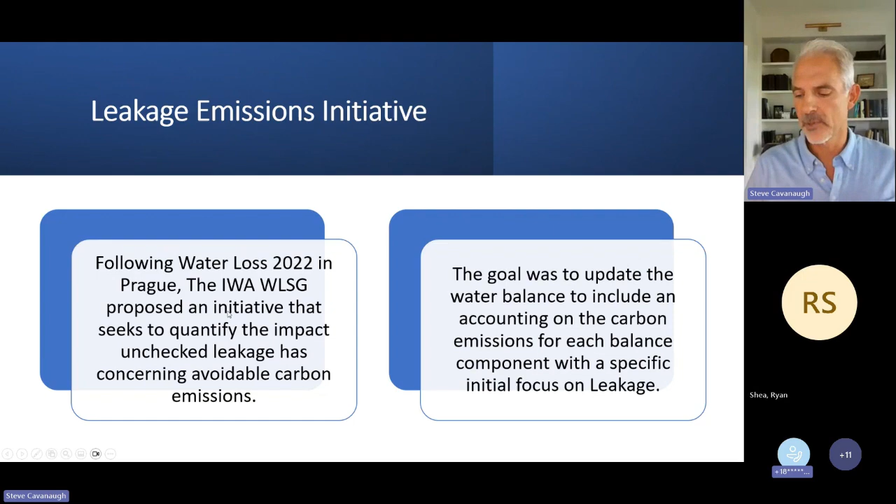So our initial goal was to update the water balance. I'm going to describe that in a moment, and then really create the carbon water balance that we could definitively be able to push out globally.

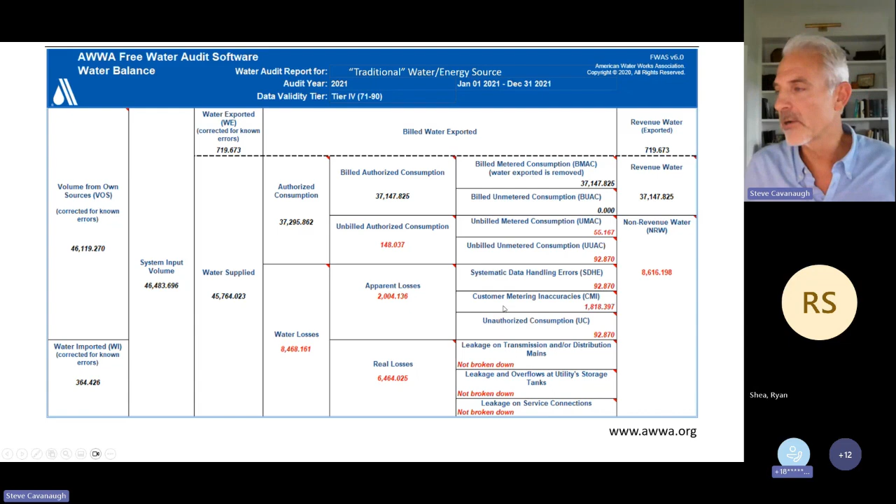The largest component of this always is in customer metering inaccuracy. And this is the nature of meters. It's getting better based on the solid state meter technology that's coming in. But the majority of meters in North America are mechanical style meters, nutating disc. And so that meter is actually not going to get faster over time. It's going to actually slow down based on the tuberculation that's in the water and the wear and tear on that moving part. So customer metering inaccuracies is a big portion of this.

Systematic data handling errors between the billing system of the date and time and measurement quantity of the read to the point at which the bill goes out the door, and then the corrections, the errors, the stopped meters, all of those things that happen in those handling aspects. And the other, we from a friendly way, call it unauthorized consumption. I call it more directly theft, people helping themselves, and that is a challenge in distribution systems, some more so than others. But the sum of these three really get us to what is the apparent loss or the commercial losses. It's important because that's different than leakage.

And this is where we're going to really focus our time on in the carbon discussion here in just a moment. But it's important that this water balance and the methodology and these best practices that we really latch onto these as well, because if you look at this without doing an appropriate review and evaluation of your apparent losses, it's a balance, and the resultant is system input volume, breaking out how much is actually water supplied to distribution, minus our authorized consumption, minus our informed estimates, and through testing of customer meters, our apparent losses, equals on a top-down basis the real loss. And so this is our resultant number that now we can look at and really start to take actionable steps on.

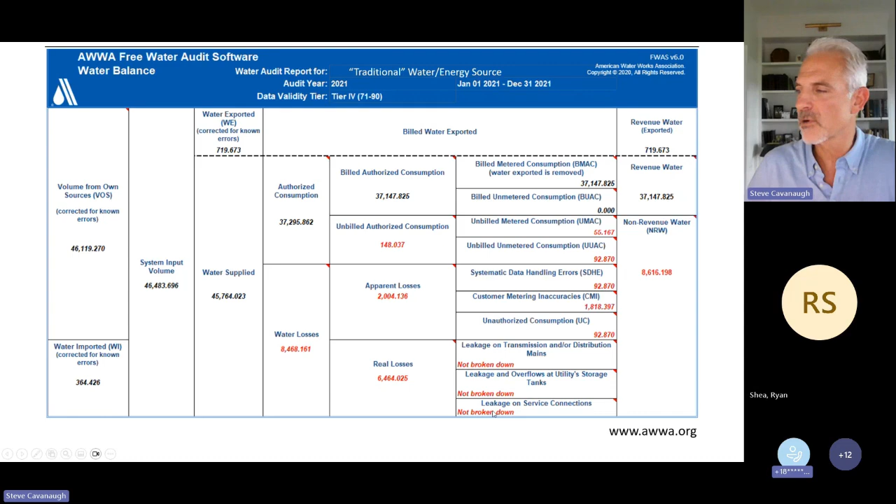All right. So I just showed you the water balance, the top-down methodology, but in leakage management, you have to now break the leakage down, because if you remember on that previous slide, it said not broken down, how much was on transmission mains, the overflows at storage, and service connections. Where we start to break down leakage is we get into what's called a leakage component analysis.

And this is important to show how we go from the top-down water balance into a component analysis to say, okay, utilities are now, at least through several research papers and best practices and technical presentations, starting to track what they are responding to, what we call reported leakage, the leaks that find you. They come to the intersection, they close the streets, they flood the Los Angeles Lakers floor. It's the ones that come to the surface. You have to interact with them.

And so now we're tracking it. We're saying how many leaks did we respond to on mains and service lines, and then making reasonable estimates of that total leakage based on runtime. The other side of this is background leakage. This component here, very important. These are the weeps and seeps that are a function of the physics of your system.

Every distribution system is operated under pressure by law from a safety and water quality standpoint. So there are so many miles of main, the operating pressure and the number of service connections. Those are the elements plus your infrastructure condition factor that make up what is your technical minimum. Unless you replace the asset, the pipes, or unless you modulate or change pressure, you're going to have that amount of background leakage.

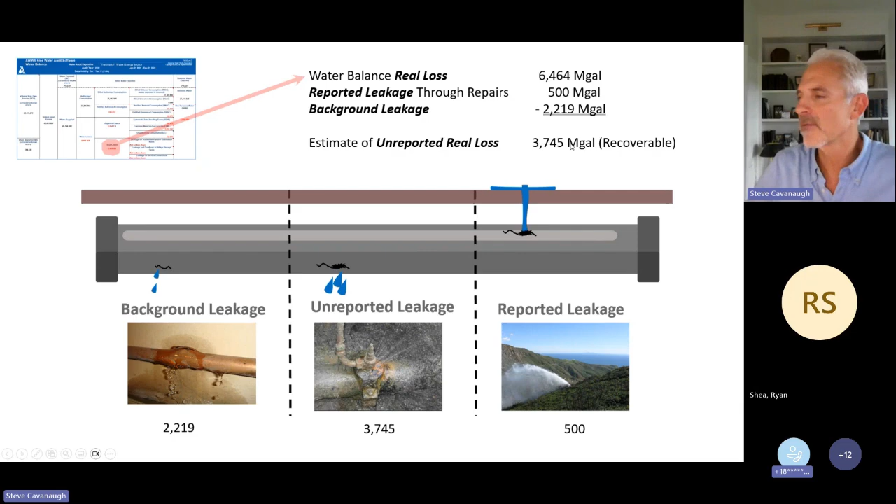So now I want to go back in your mind and think about those three things I talked about to get us to what is the specific carbon intensity. So it's the energy source in terms of how dirty the power is, the grams of CO2 per kilowatt hour. It's how many millions of gallons we put into the distribution system. So total system input volume here, following that same example that I was doing before, that's 45 billion gallons going into distribution.

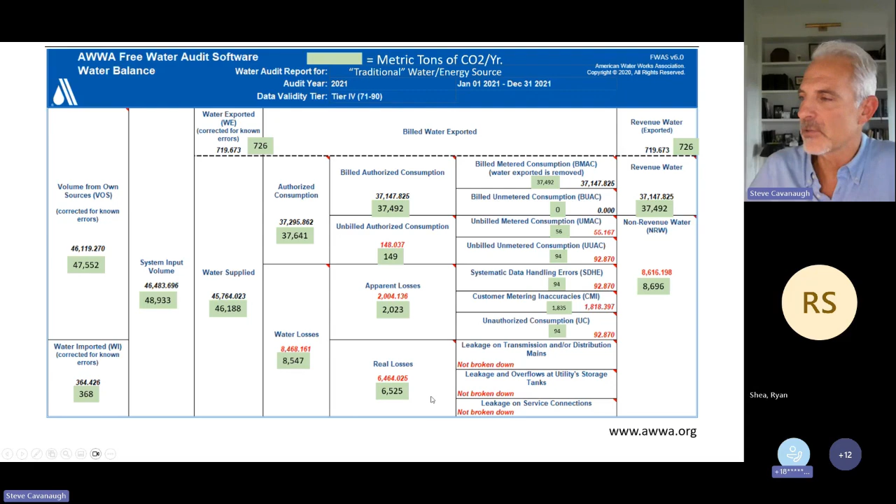And then we also know how much energy in total kilowatt hours we use to produce that water into distribution. So we now can calculate that carbon intensity and then apply it to every component in our water balance. So that is how we get to the total bogey, if you will, of real loss.

So following through on that same example, this is metric tons of CO2 per year. So in this example, based on the carbon intensity, it was pretty close to 1. You can see that we had 3.7 billion gallons equaled 3,780 metric tons of CO2. It's not always like that. It just happens to be in this example.

So now when we're positioning this project and moving it forward, for those of you who said, hey, what is our carbon intensity, and starting to look at our carbon footprint, now you're able to say, if we interact and go and remove 3.7 billion gallons of leakage from our distribution system, we're able to remove 3,780 metric tons of carbon.

And just kind of a quick note, 1,000 metric tons is about 217 cars off the road per year. So a lot of utilities start to equate that to something that people can latch hold of. So in this case, that's 850, 820, something like that, cars off the road.

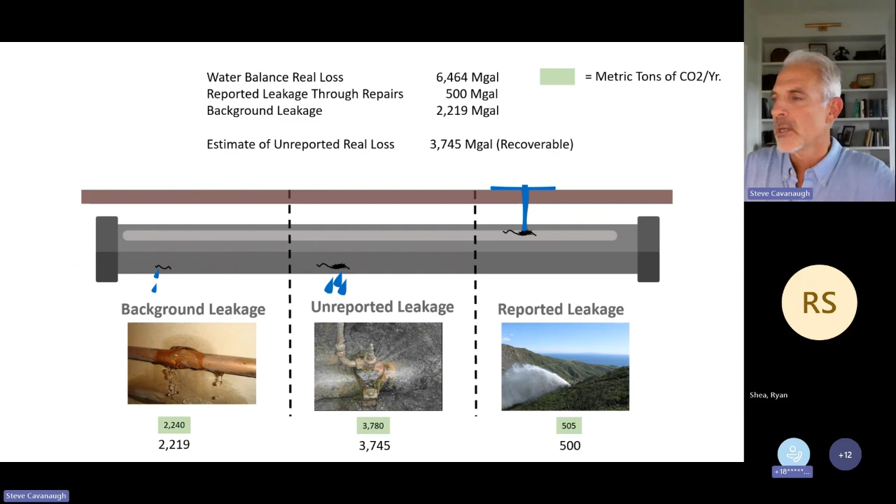Continuing on, this is a little bit of the math behind this, and I mentioned the committee report from AWWA that's now approved, but another example, so this is 10 billion gallons per year, reference carbon intensity again from eGrid or electricitymaps.com in terms of grams per kilowatt hour. What is the total energy usage for the water utility? That gets us to a specific utility carbon intensity in grams per million gallons.

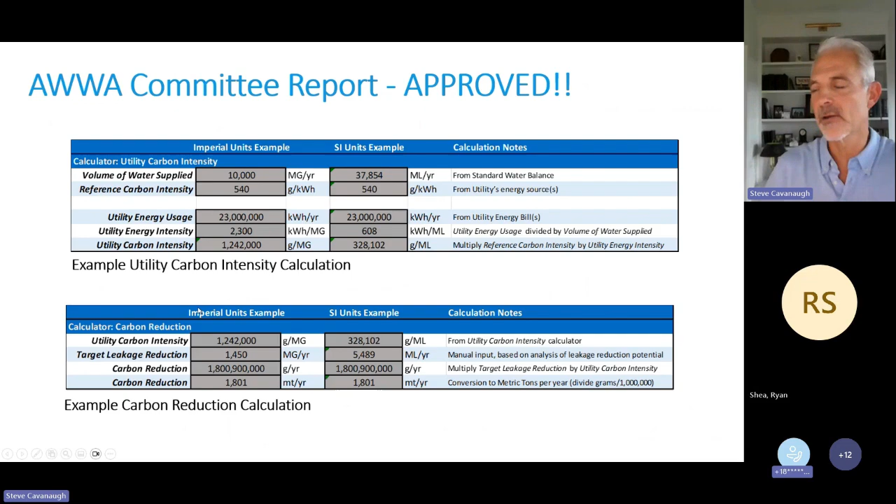And now we have a target leakage reduction that we have in this. So this is 1.4 billion gallons, and then our carbon reduction and what that means of total metric tons per year. So again, just something to sort of latch on relative to how you would go about calculating it. There is a carbon calculator, a leakage carbon calculator on the LEI website as well.

So this flood of money, and Elaine brought that title into play, and I was like, let's call it a spigot right now. We hope that it will turn into a flood of money, but we are working hard on what's called carbon leakage credits. And so we got the concept from what's been happening in the agricultural side, where you have the methane avoidance from swine, dairy, poultry farms, and you're actually able to create a carbon credit as you're able to capture that.

Well, if you really fast forward this, wouldn't it be interesting to where you now have outside investors, let's say a BP, Shell, Nestle, that may have a carbon intensity for their operations of 125. So for them to get to carbon neutrality, what they have to do is invest in projects, opportunities that have a negative carbon intensity.

So, the dream scenario that I see out there potentially is let's just say somebody is now coming to Mass Waterworks or Hartford and saying, hey, I want to buy the rights to your leakage. And you have gone through the math, you've shown a project, and it shows that it's going to reduce 2,000 metric tons of carbon. There could be a negotiated payment for that carbon in terms of the carbon leakage credit that the utility can then use and leverage to perform the leakage reduction project.

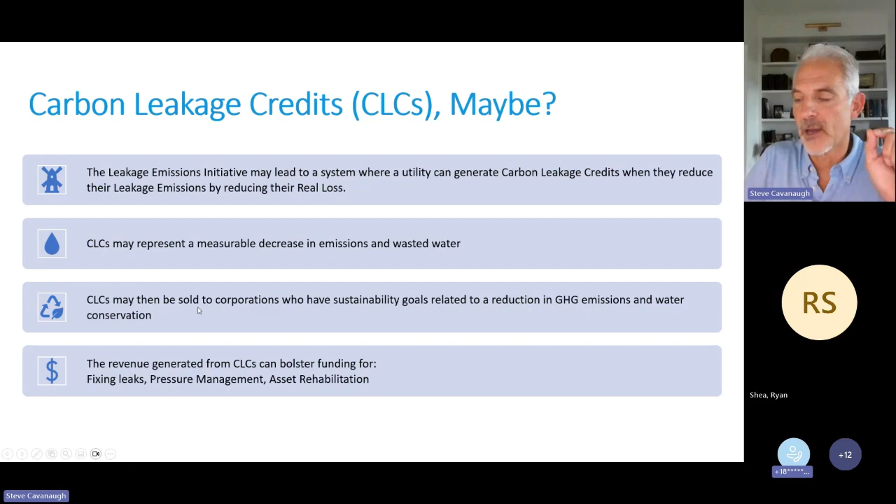But we have it now. We have the International Water Association first, and now it's joined by the American Waterworks Association, or almost through all of the channels of the AWWA, to get us what we need, that we've got a verifiable methodology to be able to calculate that carbon.

So another thing, and this could be why some of you that raised your hand have said, hey, I'm interested in this, is the states are starting to lean in and have their own targets. And so basically, I'm going to briefly talk about, on a global sense, what's called NDCs, or nationally determined contributions. And every country that signed on to the Paris Accords, they have things like, we're going to reduce to 1995 levels by 2030. So they have these goals.

What we're doing is we're now going back to those same ministries of the environment that have these targets and goals, and we're saying, look, if you fund a leakage reduction project and we're able to reduce this many metric tons, you should be able to claim that. This is helping you get towards your targets. Well, in the States, we have something that's very similar.

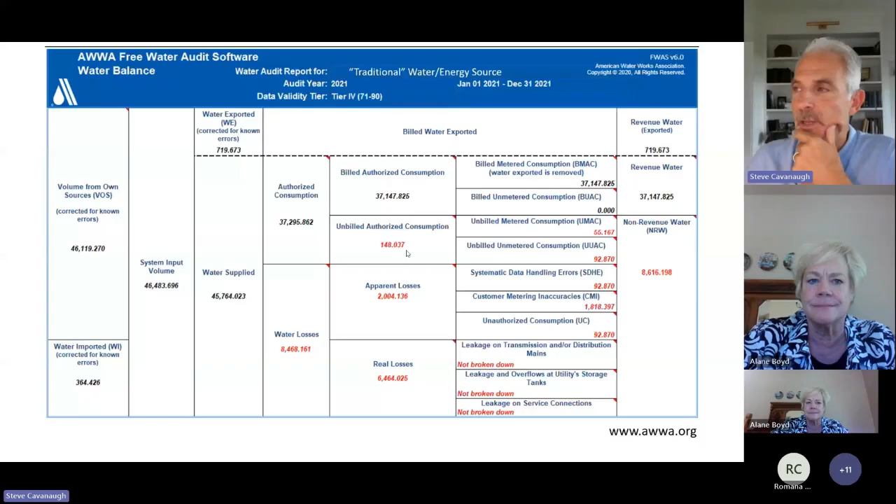Let me go back to that slide and I'll share the balance. So in many cases, and what Alane just spoke about was, I didn't spend a lot of time, but if you see that little parenthetical here, it says corrected for known errors, corrected for known errors. And also on the water exported. So the 90% that Alane was talking about, this is a

systemic problem across North American utilities, and that is that we have water that's going into our distribution systems, or that we're exporting and selling, or that we're importing from. And that meter may be calibrated, which gets amalgamated into we have our meters tested. But in reality, the calibration is basically the signal. It's taking whatever it was measuring, if it's rotations, pulses, pressure drop, and it's converting that through a signal into millions of gallons or whatever the recording piece is.

And that typically happens through a 4 to 20 milliamp signal process. And so the calibration says, okay, 4 milliamps equals zero flow, and 20 milliamps equals max flow or full flow or target flow, whatever it might be set up for. So the utilities, as they are testing their meter, are doing that signal calibration and finding that many times that's accurate. It was just a skosh off, and so they tweak it.

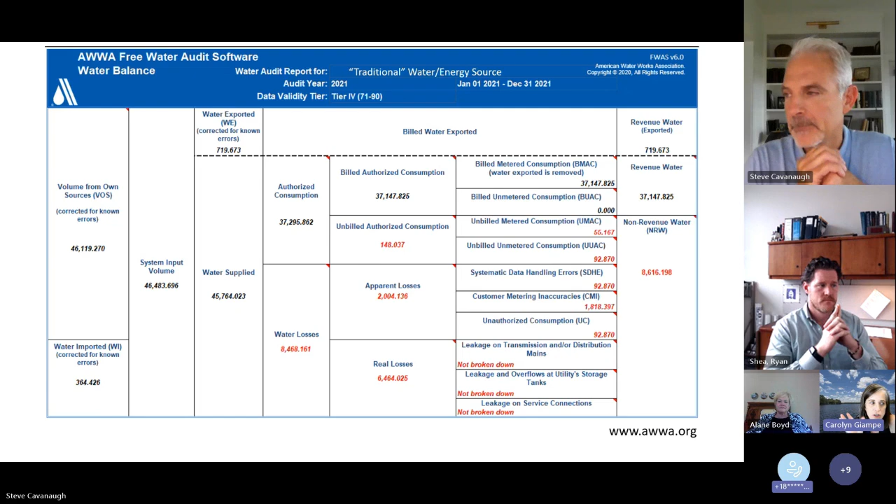I see a question. Hello. Yeah, taking action from the audit is a key. But my question is about the categorization of the leakage, the reported, unreported, and background. Yes. Is the reported leakage an actual number from... That's right. Right. That's from you. The breaks that you fixed and you estimated the rate. And then the unreported and background leakage, is that like a published ratio that's available somewhere?

So the background leakage, let me go to that, because the unreported is the deduction between the two. And what you may have discovered through proactive leak detection.

Let's just say you've got crews that are going out there and they're sounding hydrants and valves and so forth. Then they are building that component. This is called a component analysis, breaking it down by its components. So reported leakage, that's coming from you, what you're doing and you're responding to. It's what gets reported to you.

But the unreported or hidden, if you've had crews doing that within your audit year where we're doing this component analysis, then that's part of it. But usually it's the remainder, as I was showing in the math here. You're taking this background leakage. It is basically the 3 factors I described: your miles of main in your distribution system, the number of service connections that you have, because those are actual taps. Those are weak points in the pipe where the pipe has been interrupted, if you will. And then the system operating pressure.

And there is a formula for that. It also includes the infrastructure condition factor, so things like age and also the material type. But the main elements are miles of mains, system operating pressure, and number of service connections. So if you look at the free water audit software that is available from AWWA and you click on the definitions tab, you'll see the exact formula in there for what's called the UARL, unavoidable annual real loss. Okay, so it's in there. It's in the software.

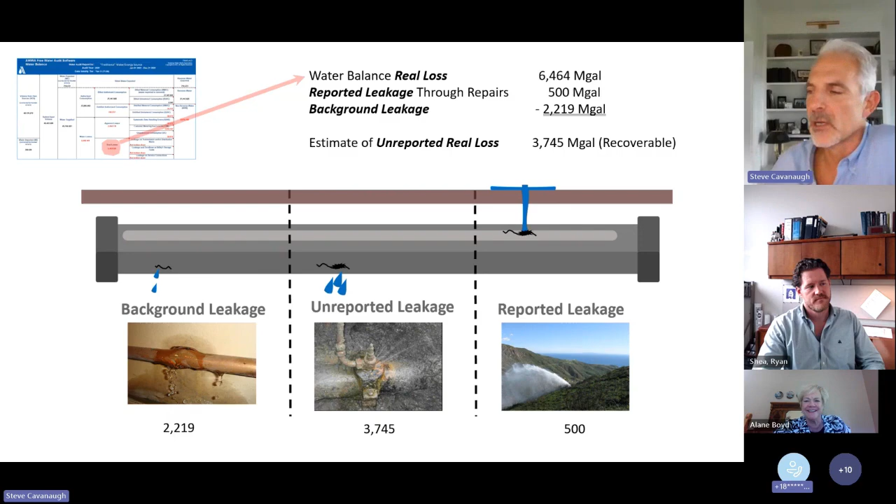So what about the carbon? Is that too complicated for folks to grasp, or is it something that makes sense? Let me go back to that definitions tab. Really the components of it: how dirty is the energy? Hopefully by me giving the example of the Caribbean island and tankering in the fuel and how dirty that power was, and then, if it was a desal, that uses quite a bit more than the Austrian system that I described in Vienna. And then obviously how much water you're producing. Does the logic make sense? You take how dirty it was coming in, how much energy we used, and how much you produced.

Okay. Yeah, Steve, could you go back to that map that showed that? I thought that was quite interesting. So it appears that the New England area is kind of moderate. Yeah, I'm gonna go live to the LEI website. Get out of that, and I can do this very quickly. Let me show you the actual. We'll go right in on New England as an example. So resources. Let me get the share going again.

So I'm on the LEI website now, and I'm going to resources. Here's where the white paper is. If you look in the resources, the very first tab you'll see is the actual white paper itself. A version of this presentation is there. There also is a leakage emissions calculator. So the calculator that I showed the math is right there. It's an Excel spreadsheet. So I encourage you to go in and you can calculate your own carbon intensity.

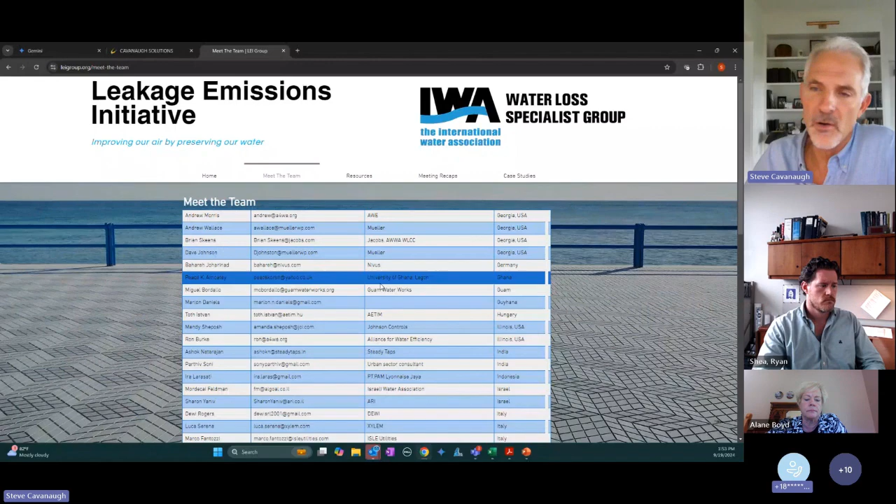Also, the case studies I was describing, there's a template. If you have done a leakage reduction project, there's a very simple template of how you can get that posted. And then we've got 4 or so case studies that are there. We need more. I mentioned the 90 or so that are involved and active in this. You can mouse around and see, but these are all of the countries that are involved and very active in the leakage emissions initiative.

But let me get to the calculator. Come on. There we go. Electricitymaps.com is the resource. And we'll go right in to Connecticut. And it's showing 333 grams of CO2 per kilowatt hour. And this is updated all the time relative to the data from the electric utilities.

Also, I'll make a comment. I've had some people say, well, gosh, we're Holland and all of our power is wind. And the reality of it is, if you're using renewable energy to drive leakage, a waste, you're taking that renewable energy away from something else. Because you would reduce all leakage if you could. We can't, and that's what we talk about, the unavoidable.

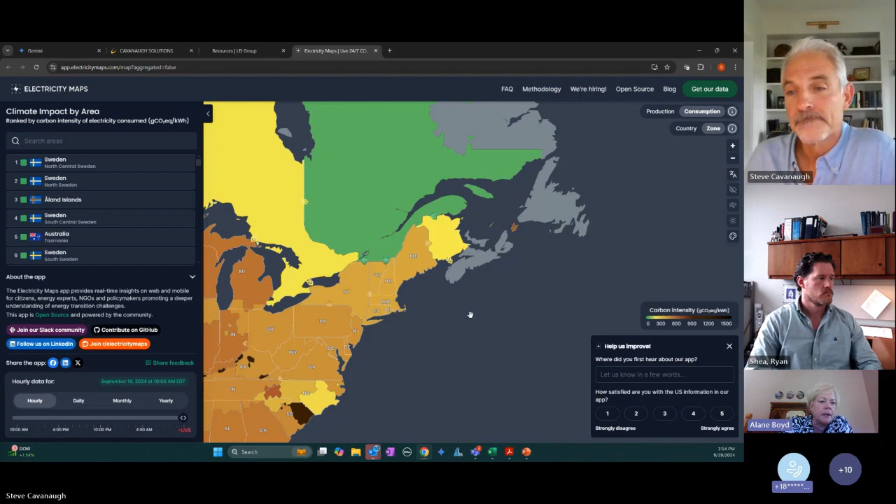But I would also say you can utilize wherever you are on the carbon intensity that's coming into the utility itself, and just use it from a calculation standpoint to help drive the reason to do the leakage reduction project. But this is that resource, Alane, and you can mouse around and see. Okay. That's great. And it's global. What's the website? Is it LEI? Yeah, the website is leigroup.org.